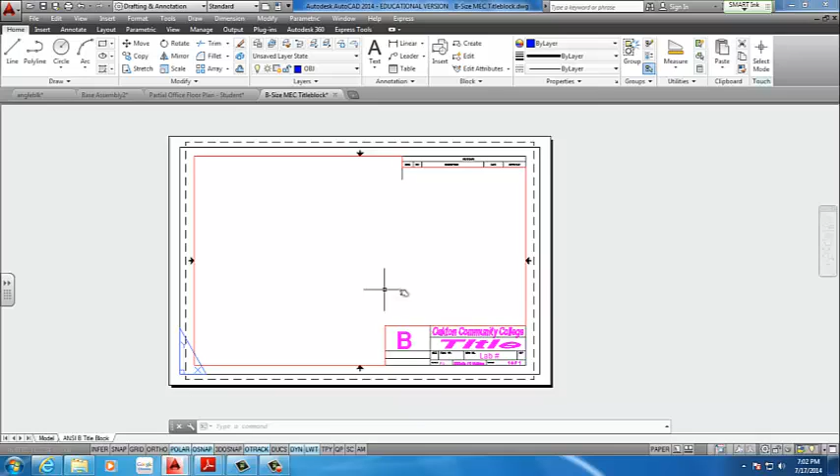So we're going to design this gasket here, as you see. It's gasket number 2. So basically a simple drawing, and I'm going to show you how I would do it in a fast way. First thing you want to do is open up a template that you're going to be using. Make sure you're not working in paper space, you're working in model space, which is down here. We're also working in drafting and annotation, not 3D modeling, nothing else. So keep that in mind.

And before you even start, what I always recommend is saving your project before you start. So you save as, we call it the gasket. Save it to the proper location. As you can see, I'm not doing it the proper way. And if you need to use other computers for this, make sure when you do save as you save it as an older version, 2010 preferably. So anybody else using an older version of AutoCAD can open your file and work on it.

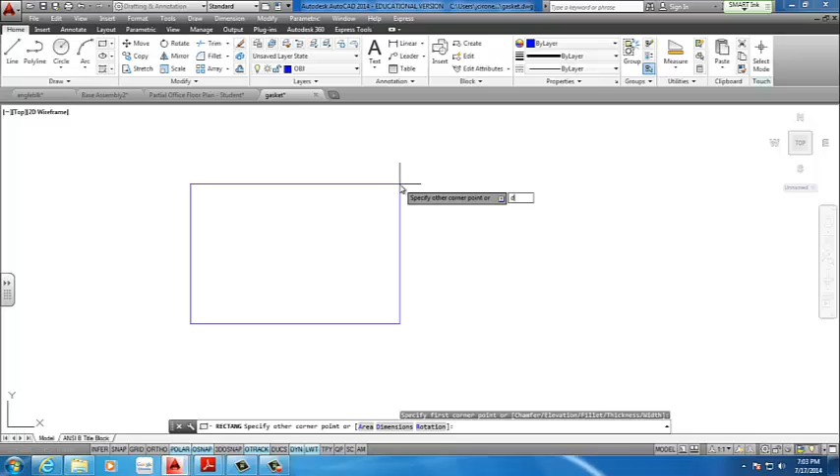The basic understanding of doing this gasket would be to get this dashed line, which is our center line of the circles. It's going to be a rectangle that's 4.5 inches by 7.5. So that's what I'm going to start with. Rectangle. Click a point on the screen. Type in D for dimensions. The width is 7.5 and the height will be 4.5. So I start out with this rectangle.

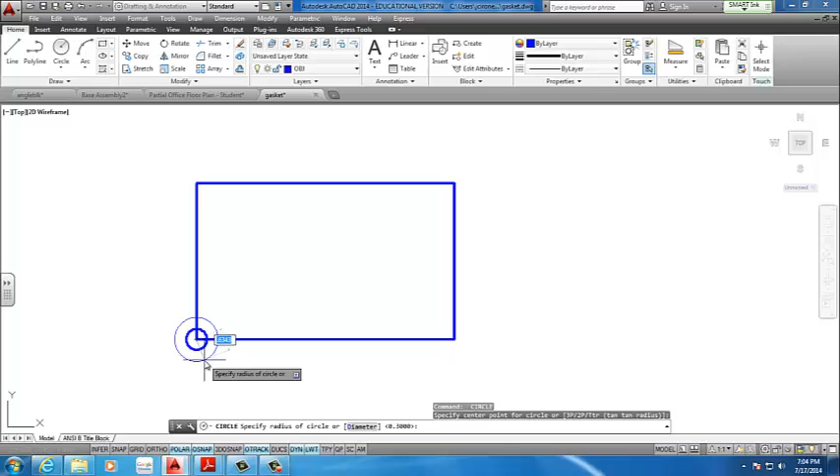From here, I know exactly my corner of my circles, and I can start doing the circles at the corner. If I can find the dimensions for them, that will be great. Diameter 0.6. And the outside of that circle is the radius of 0.75. Again, I'm getting those from the PDF. Here's 0.75 for the big circle. Here's 0.6 for the little circle.

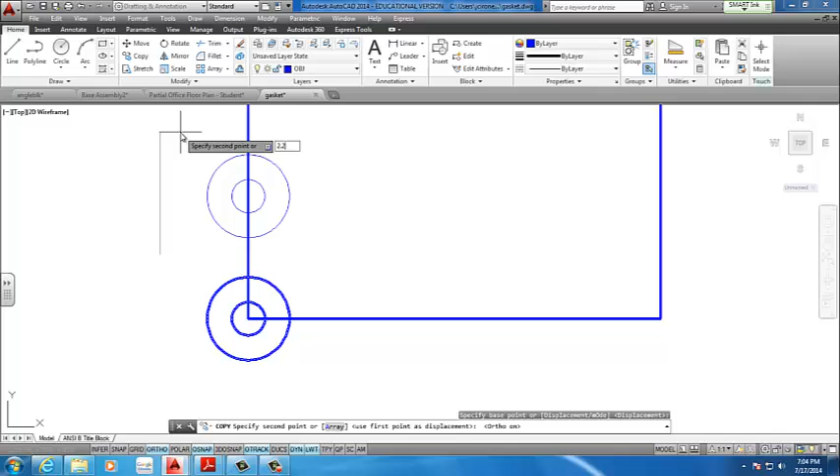Once I have those, I'm going to copy both of these up, making sure my ortho is on. That way it's perfect 90 degrees, vertical line. I'm going to type in 2.25. I'm going to do the same thing with the side here, and I'm going to move it over 2.58.

So I have that. What I want to do next, I'm going to offset this rectangle inside twice. Once to give it this line here, the trim location of the big circle, and the second is going to be this rectangle inside. My first rectangle inside is 0.75, and doing the math from that, minus 0.5, I get 0.25 offset from the center line to this end line.

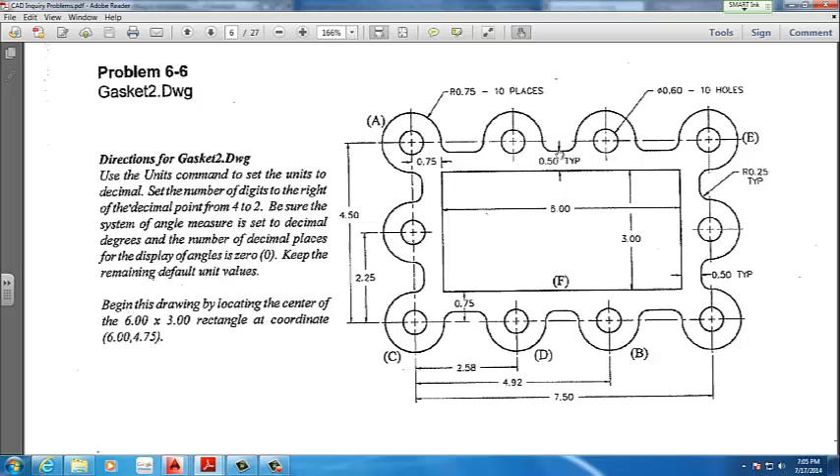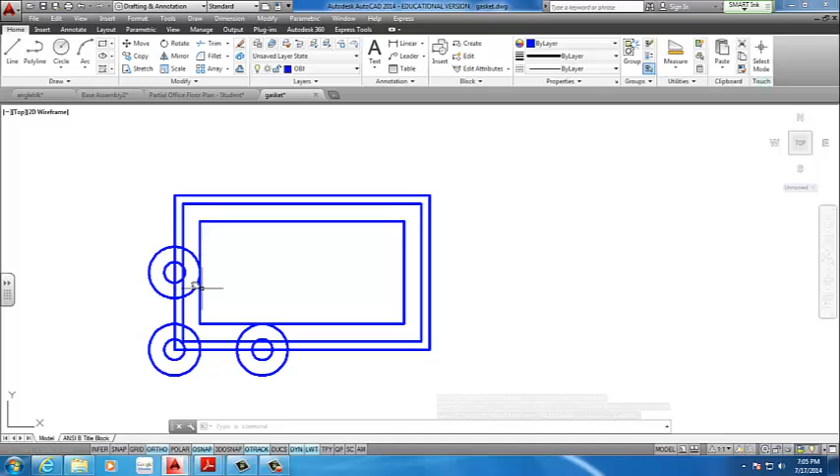So I go back to my drawing, go offset up here, 0.75, that's going to give me my center rectangle. And I'm going to offset again, 0.25. That gives my end point to this exterior circle. I'm leaving only 3 circles because I'm going to mirror them all around. I'm not going to put all the effort of doing each one separately. I'm just going to work with these 3. And that will create my perfect gasket.

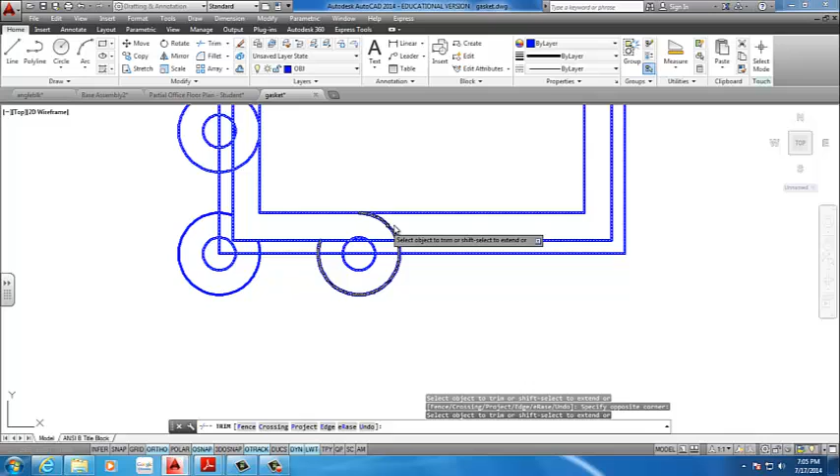At this point, all I need to do is use the trim command. So using trim, I select all my items, click space or enter, and I remove the parts I do not need. So these are going to be it. In addition to something like that. Now to keep it clear, I'm going to change this exterior, the center line, from object to, what is it, center. That way I don't get confused.

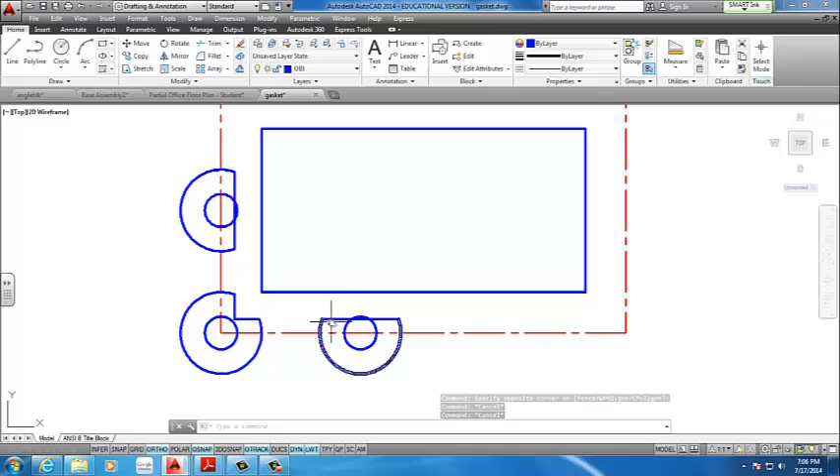Oh, I did make a mistake. I was supposed to keep the exterior lines, not the interior. So I'm just going to go undo. What happens when you rush too fast? Again, change the rectangle outside to a center. And I'm going to use the trim command again, select everything, and I'm trimming the inside of the circles.

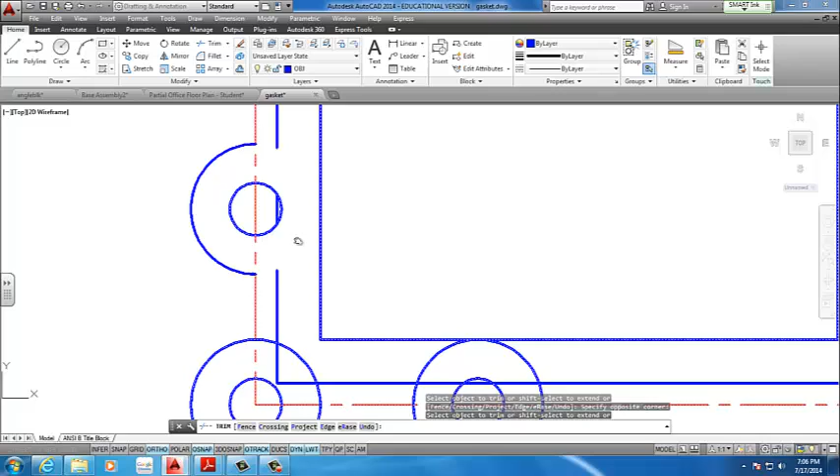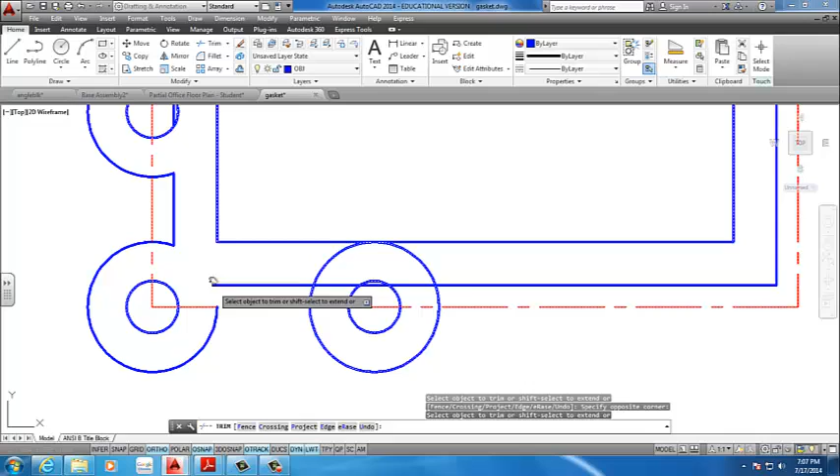Oh, something's going on here. It's never perfect. Trim, select all, and need to trim these. There we go. Make sure you trim the lines inside first, and then the circle. For some reason, it's causing problems, as you can see, which we can fix. Should be just snapping onto that line. There's additional lines that are no longer needed, so delete those. And we end up with the gasket

outline. Next thing we need to put the fillets here. So our fillets are radius 0.25. So we go to fillet, R for radius, 0.25, and I fillet these up. That's going.

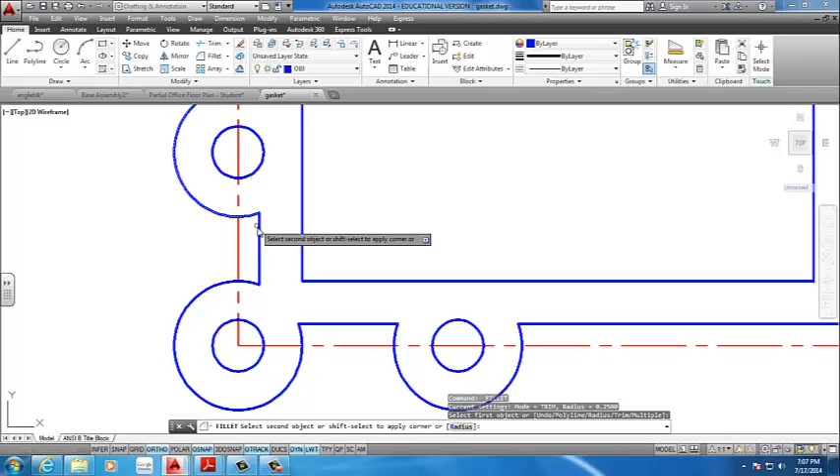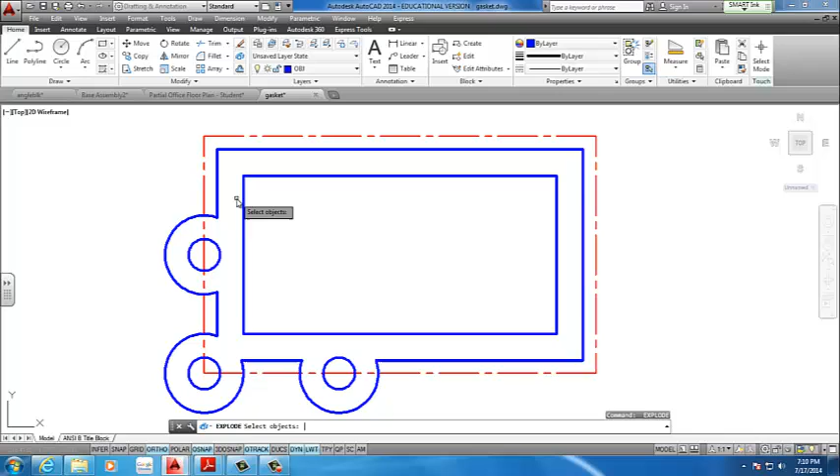If for some reason you can't fillet these edges, the problem may be that your lines are actually still polylines. So what you want to do is take those lines and explode them. I guess the newer versions of AutoCAD require you to explode the lines before you can do a fillet to them based on this situation. So then we go fillet, we get the radius 0.25. We can fillet up the edges like so.

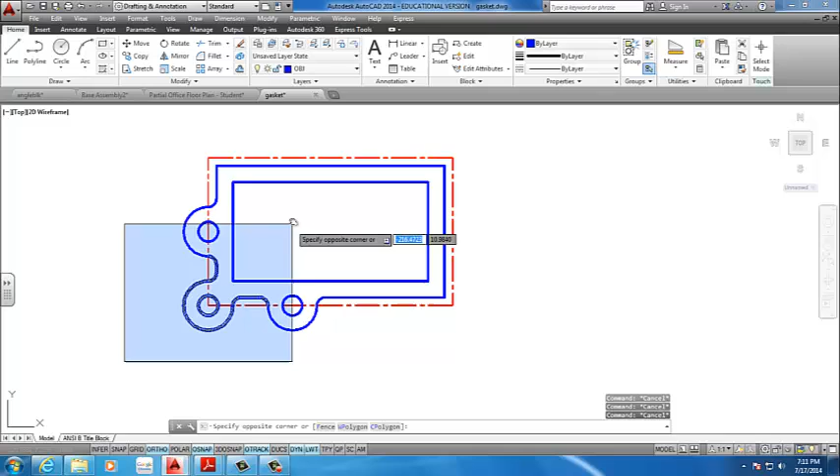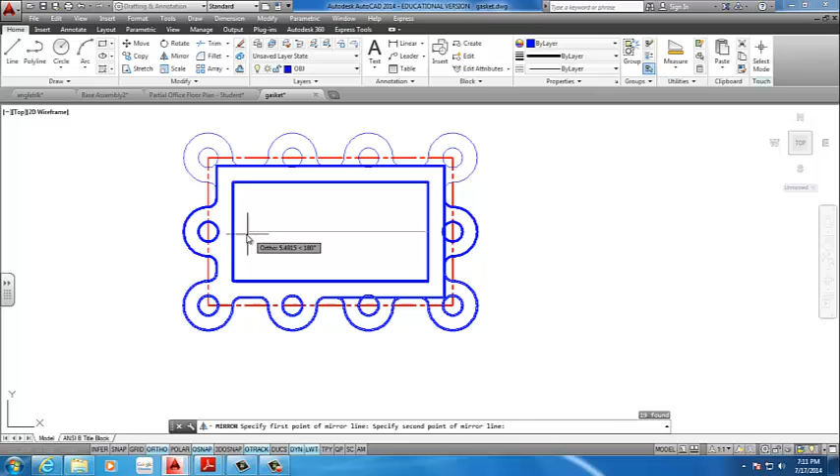And then once we have that, what I can do is I can select this area here, and I'm going to mirror it over using the midpoint of this rectangle. If you don't have midpoint on, make sure your O-snap is on, and you right click on it, make sure midpoint is highlighted. Do that, and I'm going to copy this bottom portion, and I'm going to mirror it over my horizontal line. Finally, I can just delete this rectangle.

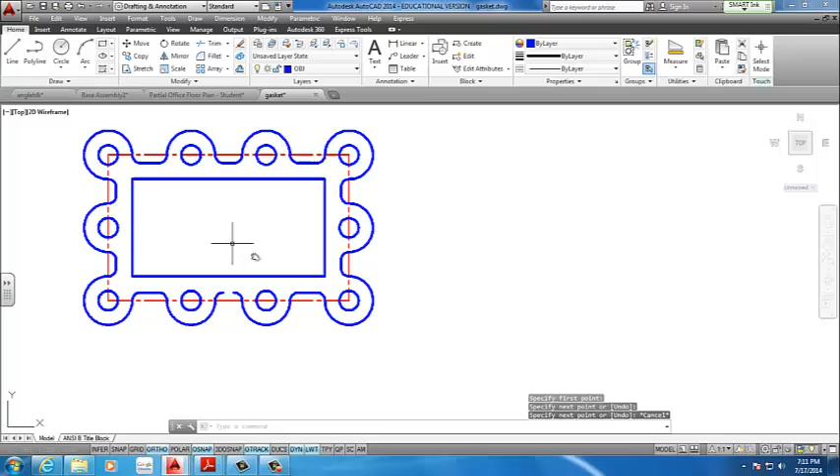Except I'm missing a few lines. So the lines that you need to add, you'll see them here. But that was the easy way.